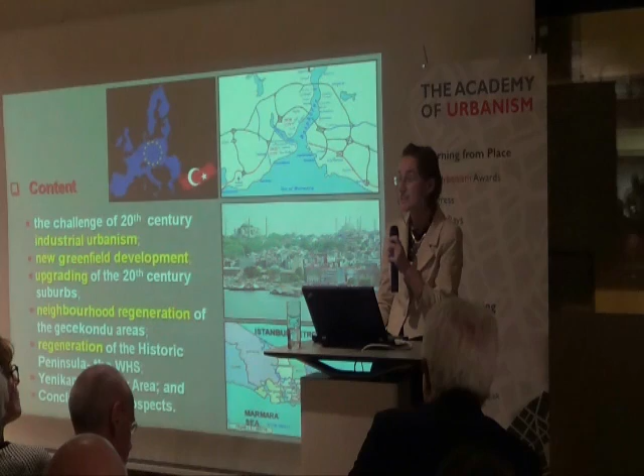Then I'll hand over to Mr. Bozkurt to share with you the Yeni Kapı Transfer Area competition project, which he won jointly with two other consortium members. So talking about the challenge of 20th century industrial development, industrial urbanism, what that means.

Explosive urbanization since the 1960s, driven by urban industrial development, encouraged rural population moving towards the west, mainly to Istanbul as the attractive center. Population increased from 2 million in the 1960s to 10 million by the turn of the century, and it's projected to reach 23 million.

That is the projected population number if unchecked. Currently it is around 15 million.

Rapidly increasing population is accommodated through a number of ways. The first wave of rural migration was contained through shanty towns, self-built, built overnight - Gecekondu is the Turkish name - towns which were informally redeveloped through shared construction processes, producing mainly 4, 5, 6-story apartment blocks, which were retrospectively legalized.

We can't say they're not legal, but we can't say they are up to standards either. So whilst this process produced substandard housing, it also created low income occupation on a large scale, which is in sharp contrast to the processes in Western Europe.

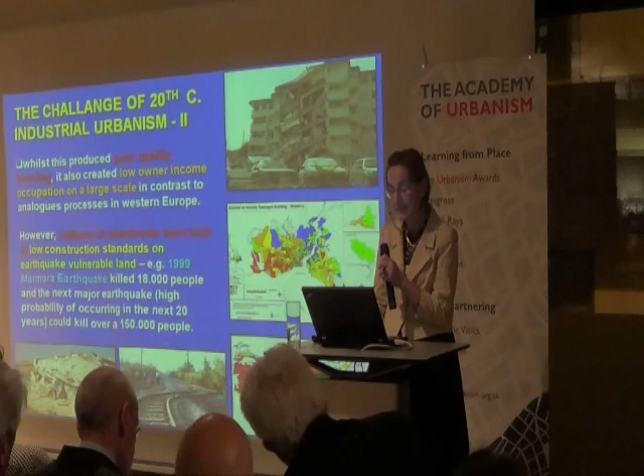Millions of apartments were built on earthquake risk land, which was demonstrated by the 1999 Marmara earthquake, which resulted in 18,000 people dead, and the economics of it was at the rate of millions. We are expecting the next earthquake within the next 20 years.

There is a 60% probability, and that is expected to kill 150,000 people minimum.

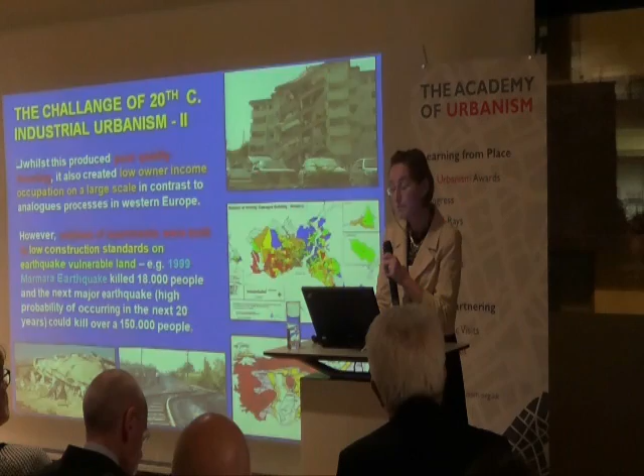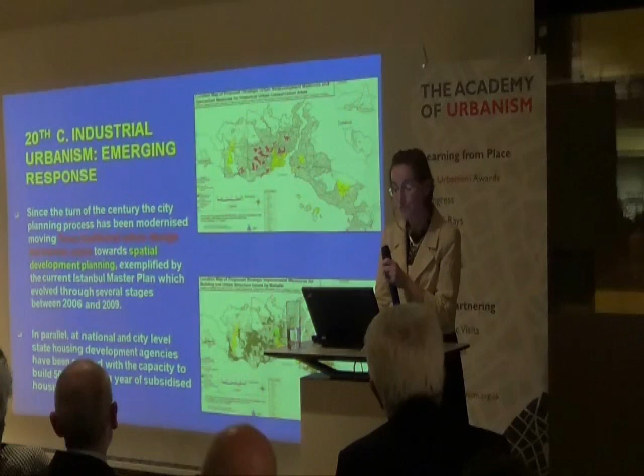So what is the emergent response to this given context and legacy? Since the turn of the century, the city process has been modernized, moving from the traditional master planning approach towards spatial planning, which was demonstrated by the 2009 strategic master plan of Istanbul.

This was also in parallel with the institutional capacity being developed, represented by the mass housing organization at a central government level and at a local level.

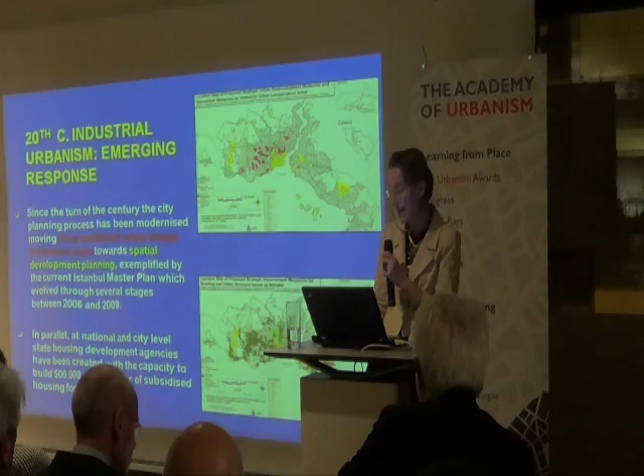These initiatives were also supported by two major changes. One of them was the introduction of the mortgage system, for the first time in the country.

The other was the fact that the Treasury was releasing inherited government land to both TOKİ mass housing organisation at a central government level and also to Kiptaş operating at a local level.

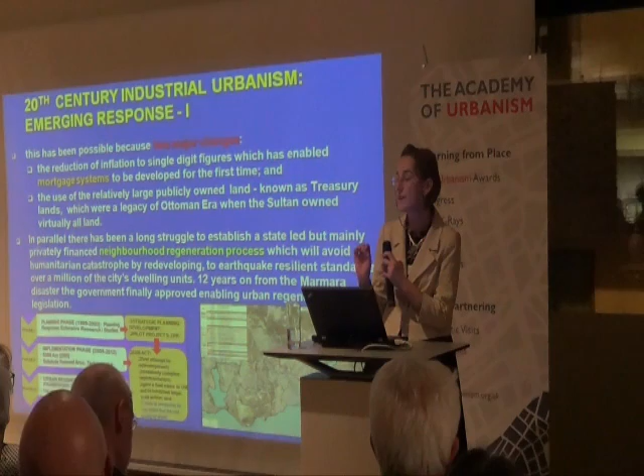Also, the neighbourhood regeneration process was privately financed. The partnership between the central government, local organisations and the private sector meant that certain mass housing schemes developed quite quickly.

This happened in the context of recently introduced legislation. The house building capacity initially halted the Gecekondu, the first generation Gecekondu process, which was the citizens' own initiative, taking their own initiative to plug the social housing gap.

In terms of new greenfield development, it is possible to say that this varies from high-income group gated communities to large-scale social housing estates with limited services provided by the public sector, at times in partnership with the private sector.

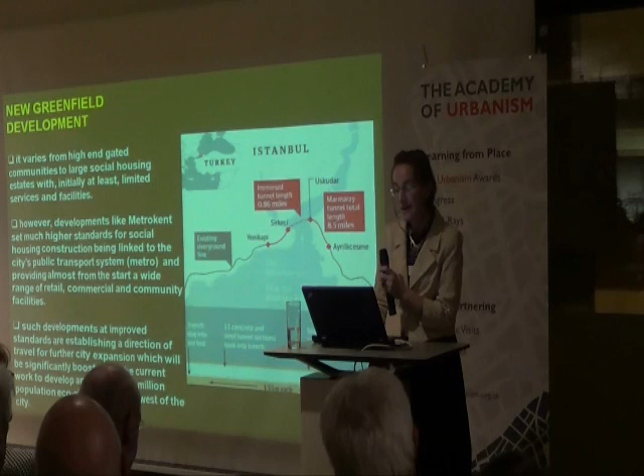The AOU team was able to see the Metrokent in Istanbul. This is a good case to demonstrate that the public sector is now in a position to provide the infrastructure. Basically, the Marmaray, as you probably heard recently - it's in operation now - is providing public facilities to these recently established housing schemes.

In terms of upgrading to 20th century suburbs, they are being upgraded as economic development brings an increase and spending power of the locals, coupled with tax revenues, so we are in a position to publicly finance the infrastructure investments.

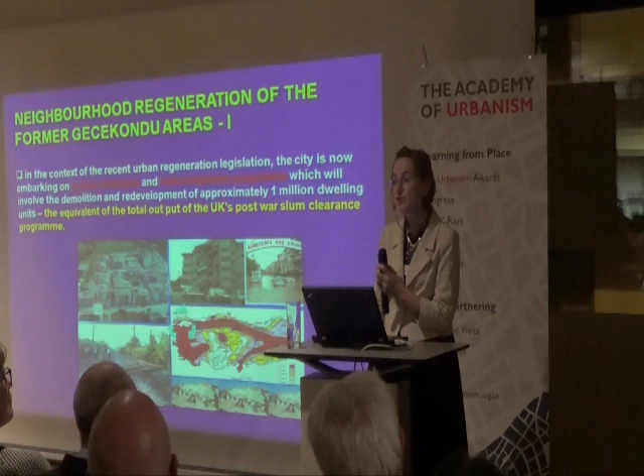In terms of neighbourhood regeneration of the former Gecekondu areas, completely illegal development on treasury land, in the context of urban regeneration legislation improved since 2005, much controversial implementation has taken place since then. The target is about 1 million dwellings to be knocked down and rebuilt, equivalent to the total output of the UK's post-war slum clearance programme, just to give a sense of the scale of the initiative.

Given the scale of the task at hand, there are both opportunities and threats at the same time. There is huge pressure to rely on top-down processes, that is, the central government going through huge restructuring processes. There is a recently established minister dealing with regeneration, for example, which is being reacted to and is obviously too rigid.

But at the same time, the positive side is that there is a bottom-up approach demonstrated by local NGOs, local leaders, local community planners and architects, as well as academics, wanting to develop a sense of ownership and take part in the process.

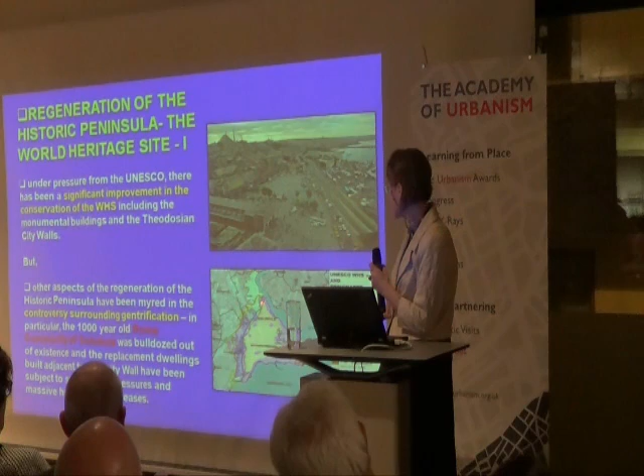Regeneration of the historic peninsula is one aspect of the general overall regeneration approach in the country, particularly in Istanbul. The historic peninsula, bounded by the old city walls, is a UNESCO World Heritage Site.

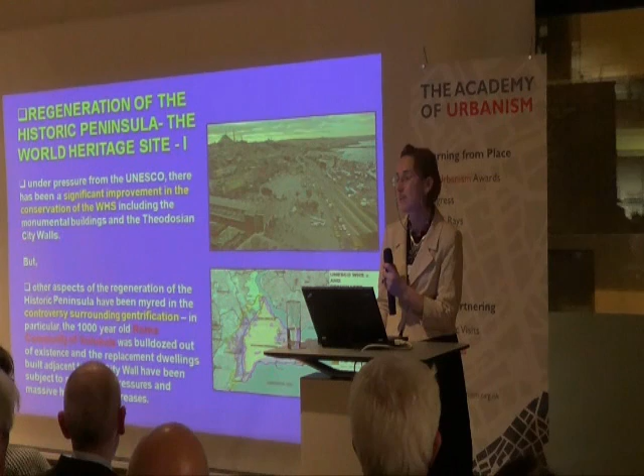It contains 4 heritage sites within it, and it's also a designated conservation area. Within this Sulukule neighbourhood, the 1,000-year-old Roma community used to live, but it is being totally erased as a result of the initiative taken by the district municipality at the time.

Regardless of the reactions or conflicts, the conflict was resolved in favour of the district municipality. The mayor's determination resulted in the total neighbourhood being erased and new development taking place.

This is just one example along the way, but generally the negative consequences of these early initiatives and implementations prompted gentrification of the area, considering both the threats and opportunities overall.

The strategic transport investment, in terms of the major impact it has as part of the Marmaray metro system, is to be considered as the next stage. In terms of the Yenikapı transfer area, Mr. Bozkurt is going to share with you the winning scheme and the details of it. Thank you.

Hello, I will present the project we had in the international competition, one of the winning projects, with my Dutch partner, Mecanoo Architects from Delft. This is our model picture, and that's our team.

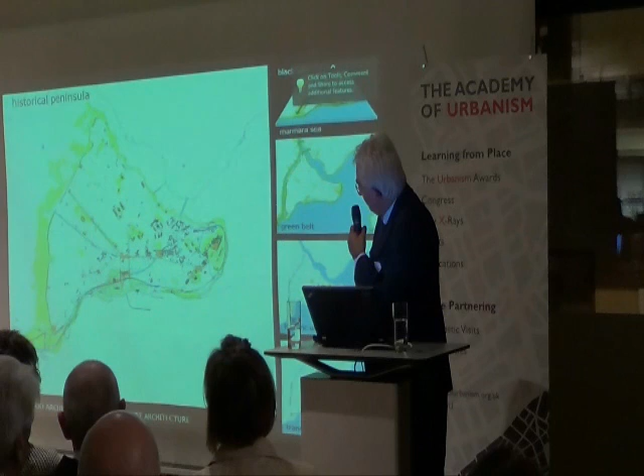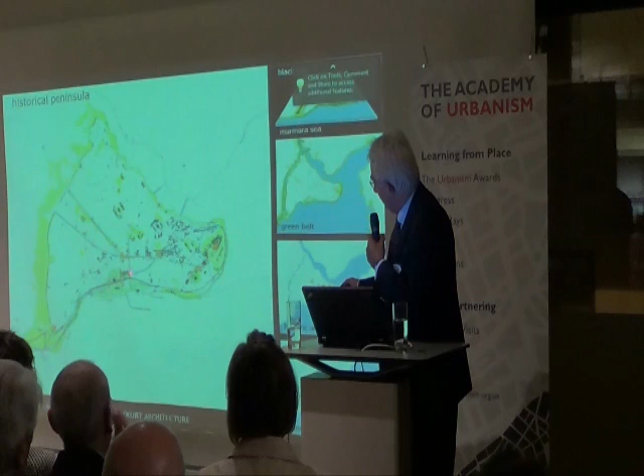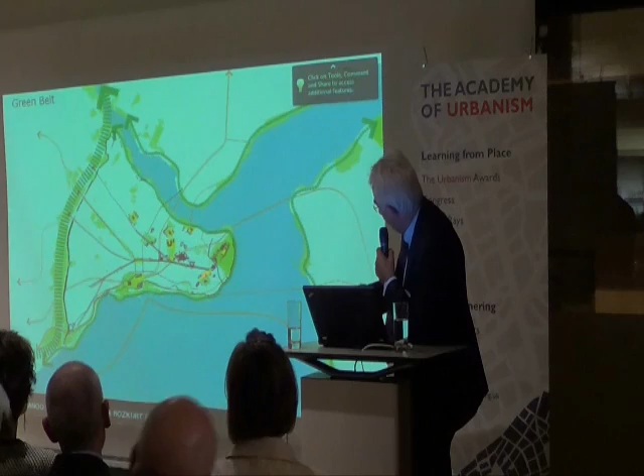Where you see the old city, all the black points are the old monuments of Istanbul, and the yellow squares are the big urban spaces, while the big dots are the old historical developments. This is the Yenikapı area, which is what we are planning to do. That complex is one of the old Istanbul squares. In our project, all the coasts are green zones, and that is the famous Mese and the main big monuments of Istanbul.

This is the old metro system, and in our project, the ferry system, we took it out from there, only the passenger boat comes here. All these dotted lines are all the metro systems, and this is the new open Marmaray project.

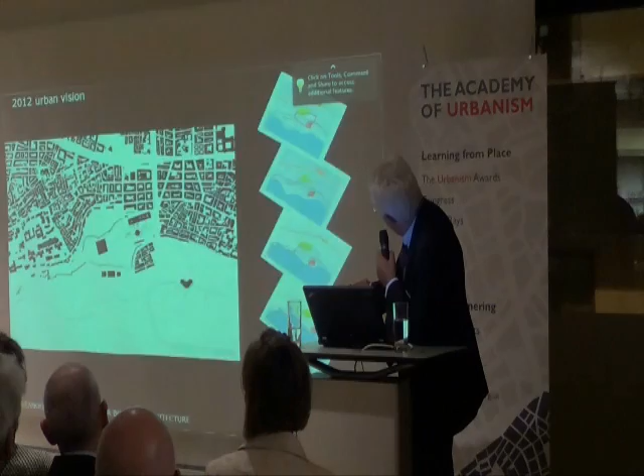These are the two buildings we offer in this complex, and this is the land use: the red part is the trade area, and the yellow part is residential.

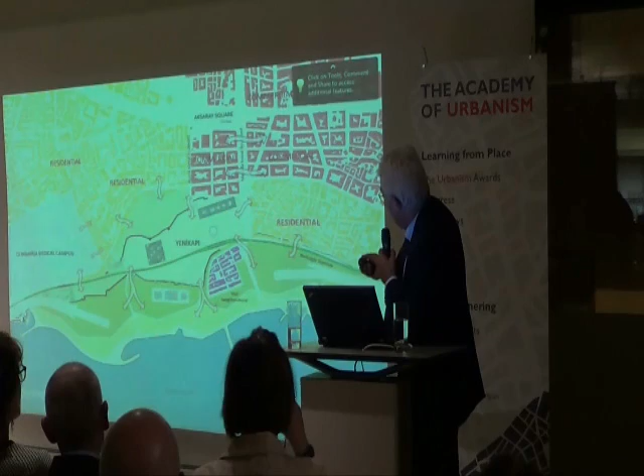I have to say, to begin with, I was born in Istanbul in 1945. The population was 850,000 for the whole city then, and today it's 15 million.

The old city was, in that period, 500,000 people, and still today it's 500,000. The big change is, instead of just residential and commercial, now plus tourism. With tourism, everything has changed also. So you see the urban activities.

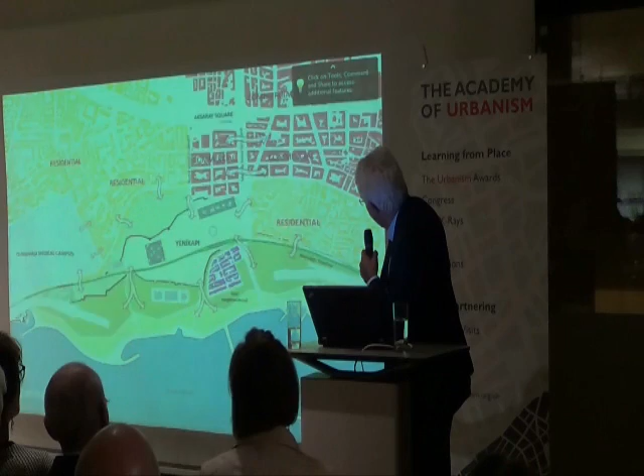Because of the tourism city, everything completely changed. So what we did also, we took all the heavy traffic underground, and we created again the slow traffic between the east and west direction of the city. This is the complete road system in our project, because it's a big urban design. It covers from Aksaray Square and all this coast, all this area.

In that picture, you see the green one is the big train system, which is the Orient Express road. We made it like that, slowed instead of that one. We made the slow tram, to connect the coast to the zone.

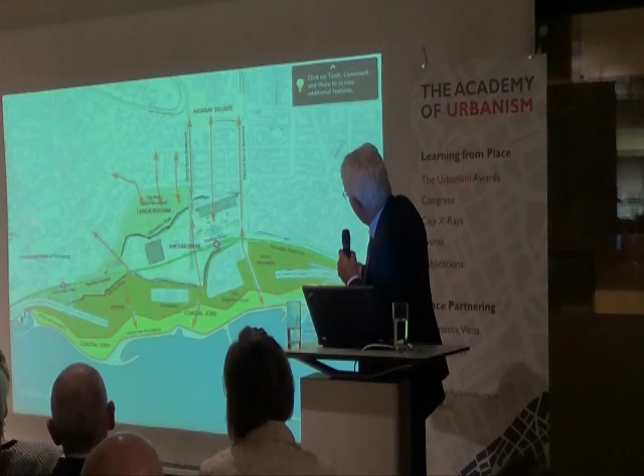And this is our model. This is the transfer center, this is today's Marmaray station, original one. This is our archaeological building for the archaeological finds, and this is our green zone, which is the local archaeo park, and the coast, and all the green zone. We connected the complete city to the coast.

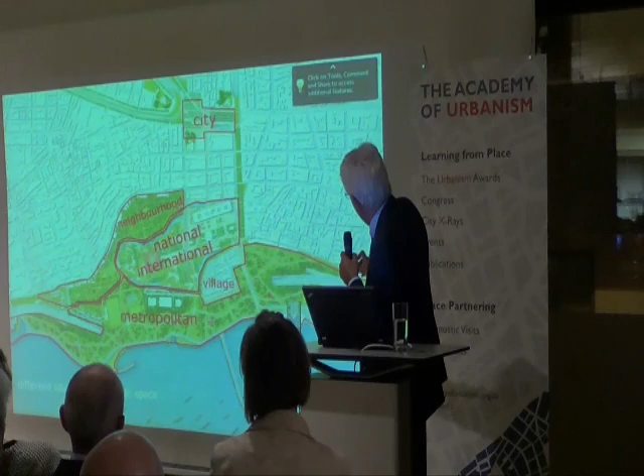That's the square, and this is the international zone, the archaeological zone, and the metropolitan green surface. And this is our design, for the city, for the neighborhood, for the international, national, metropolitan, and the old village. And this is from our model, how we integrate to the city.

If there wouldn't be this metro system excavation, the city history was only 3,500 years. Now it's 8,500 years. Thanks to that.

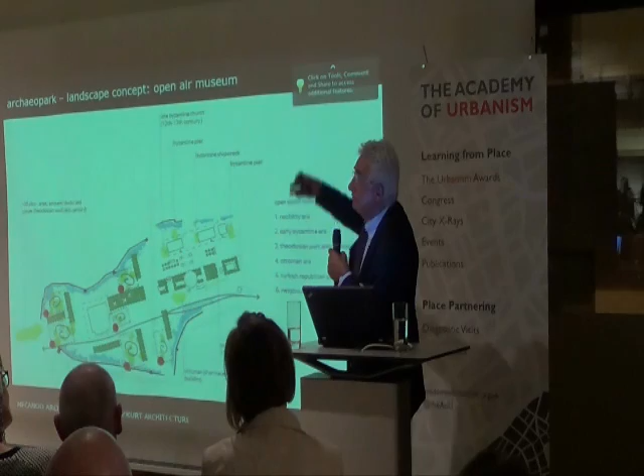In this project we said, because it's the transfer center for 1.7 million people per day, how to integrate it for the city: traffic down and slow traffic up, and all the rail system underground, and then people to the sea, to the coast, because this coast is valuable.

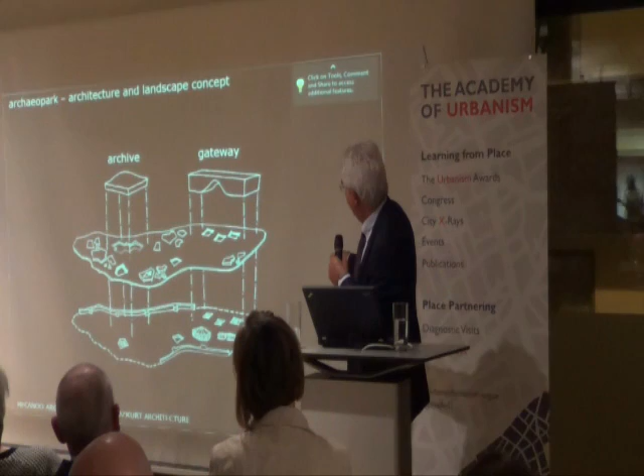And then we started this project like that, gateway and the archive building. Anyway, Yeni Kapı means new gate. So this is the gate and the transfer center, and this is the archive building. This is the transfer center, which is already, what you see, it's the excavated hole. And then the archive building. And these are the sections of this two projects.

And this is our proposal. A huge construction, of course.

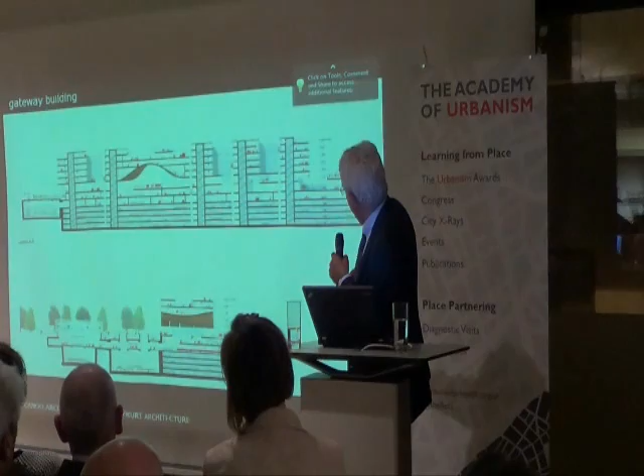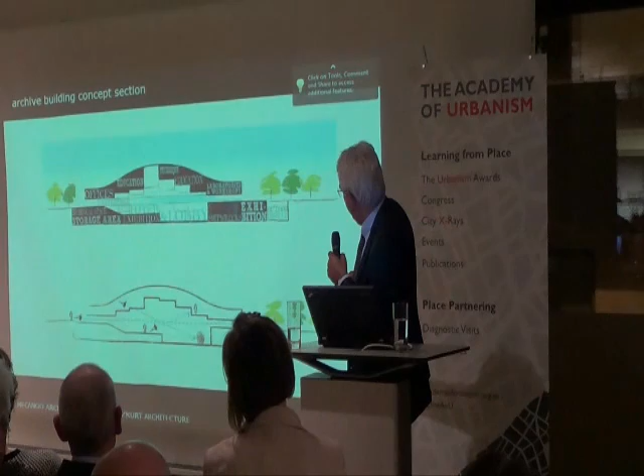I'm passing just quickly. This is the existing situation up to date, it was a little before. And this is the excavation, how they started the archaeology like that. That's why we said, let's use this pattern in our design. This is the archive building.

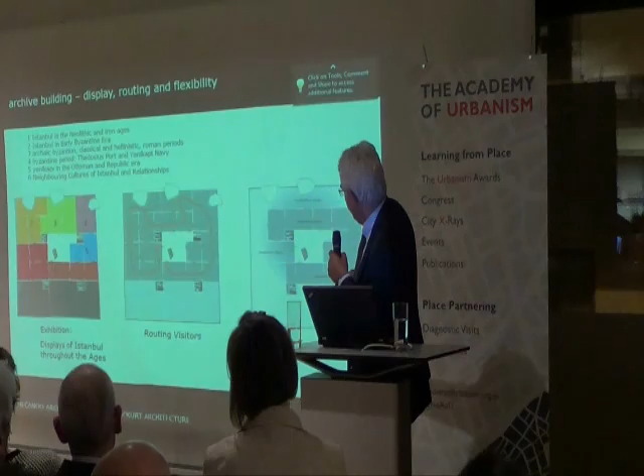That's it. We integrate to the city. Thank you.